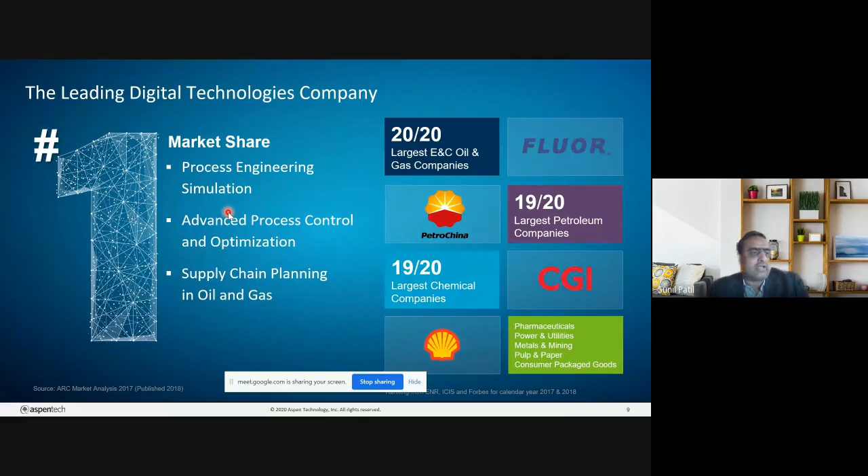What is unique to AspenTech? The key thing for AspenTech is basically deep domain expertise, because you will find many commercial simulators in the industry, but what's important is whether that simulation software has this domain expertise. What I really mean - if I have to design a heat exchanger, I can simply use Q equal to mCp delta T equal to UA delta T. These fundamentals won't change, but I'm really applying that - I'm accurately calculating U, I'm accurately calculating the area, I'm rightly sizing the exchanger, I'm rightly sizing the column.

It comes from the domain expertise, not from the software.

Software at the end of the day is code. One has to develop it and use algorithms to solve equations, but the important thing is domain expertise. We solve complex optimization problems, and AspenTech loves to solve complex problems. We have a track record of innovation, breadth and depth of mission-critical solutions, and we are hardware and platform agnostic. We don't care what platform or hardware the customer uses, whether it's a Dell server, Windows, or Linux. We support all software and hardware.

Most importantly, the last bullet point is ROI, return on investment. We measure on value. When we provide software to customers, the first and most important thing we measure is the value customers are getting out of it. That's how we measure success. It's not about how many licenses they have, but the value they are getting today. These are some of the uniqueness of AspenTech, and because of this, it's number one today and will remain number one. You'll hear from me about a lot of innovation, R&D, and new developments we're doing here.

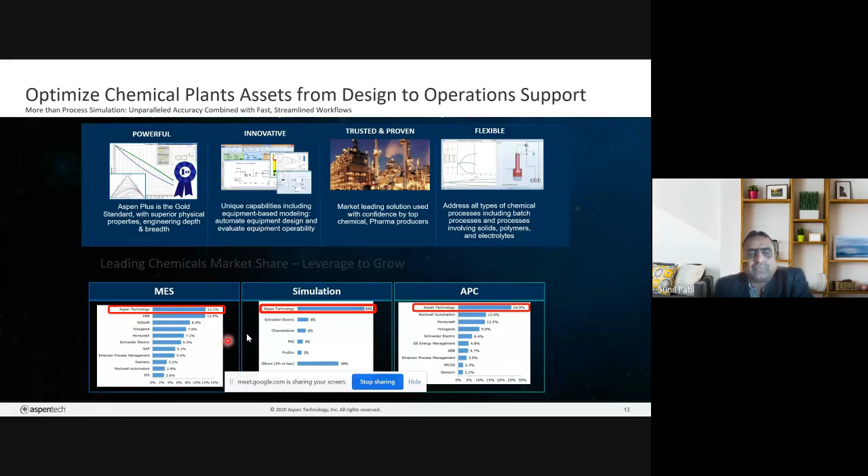We believe that optimizing asset performance in complex industrial environments makes the best companies even better. Meaning, we don't just solve one problem in the industry. Suppose there is a pump issue, or a column flooding issue - we don't solve just that one problem, we don't just fix one issue, we don't fix one equipment. We look at the entire asset, the entire plant, at a time. If the problem occurs at one place, we will make sure we address all the other problems in the plant. That's what we mean by asset performance. Asset meaning a plant - we are not talking about equipment or a process unit.

We are talking about assets, and this is the key word, as you will hear later today. Asset meaning the entire plant - software and insight that run the asset faster, safer, longer, and greener.

These are the keywords. So why are these softwares meant for? It is to ensure assets are faster - time to market is quick - safer, since safety is of prime importance for us, and longer, because the life of the plant is important. Historically people used to run a plant 15-20 years and then a revamp was required with a lot of technology changes. Now people are looking at 50, 60 years. And most importantly, greener - low emission, no pollution.

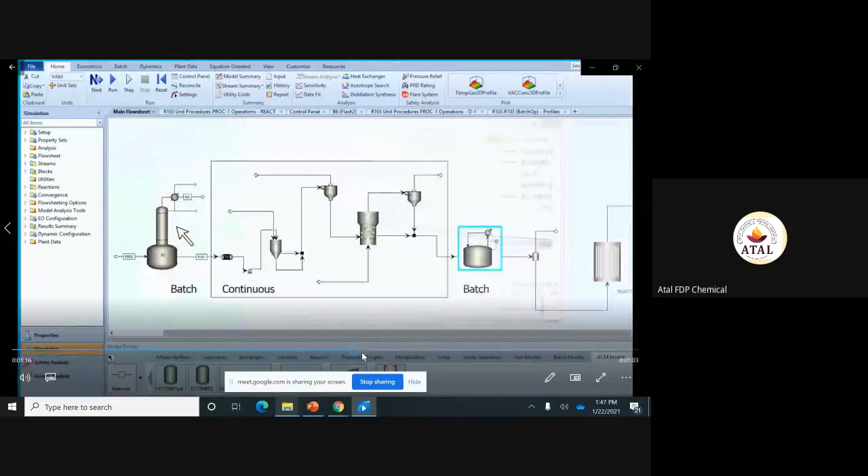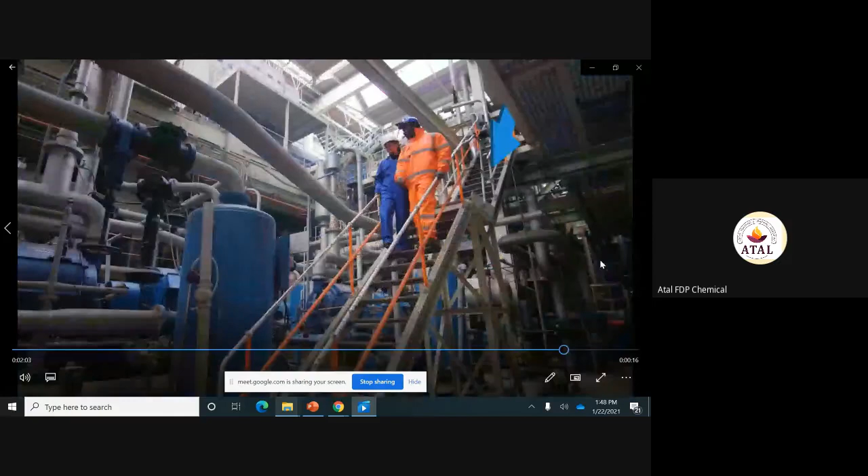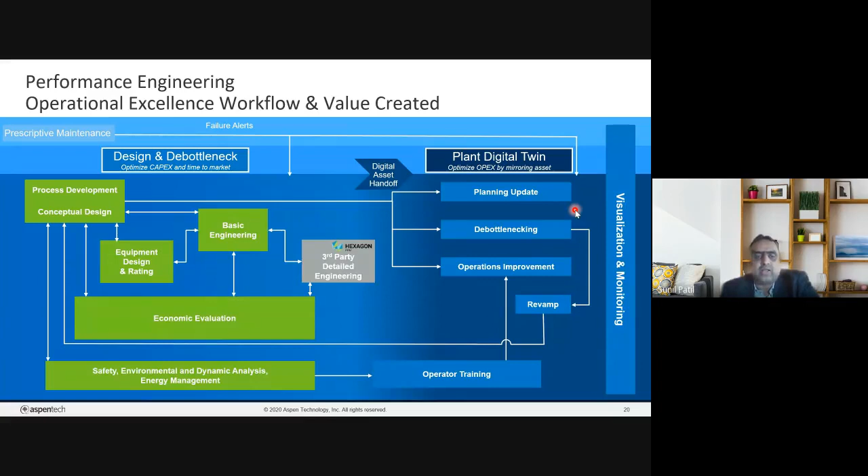And while doing that, most important is it's digitally transformed technologies and models. And you see some of the benefits here, ranging from certain percentage of reduction in capital and energy. For example, at a concept level, if you use the technologies, the savings in capital and energy from 5 to 20% is significant. Similarly, reduction in engineering design efforts, 30%, significant.

Reduce the flare loading, which actually reduces your emission. Reduce the emission, then revamp, reduce the capital, reduce the energy. Increase the capacity in debottlenecking, save certain cents per barrel. So these are the benefits.

As a consultant and engineer, when you talk to the industries, if you just talk about the solutions, no one will accept that. What people want is to see the number.

I just had a meeting with one of the Reliance board members last week, and I was a presenter, and of course we knew what they expect being Reliance. They have a very commercial mindset. My presentation started with a headline saving of X amount of dollar savings per barrel, and that's how the discussion started. Otherwise they would not have even given us the meeting to present.

So what's important to industry is the benefit, savings, value, not the technology and not the platform. But if the technology translates into value, improves the workflow, improves the digitization, people will welcome that. So whether it's in design stage, optimization, or plant operations, whatever stage you are in the industry, what matters is how the technology gives return on investment.

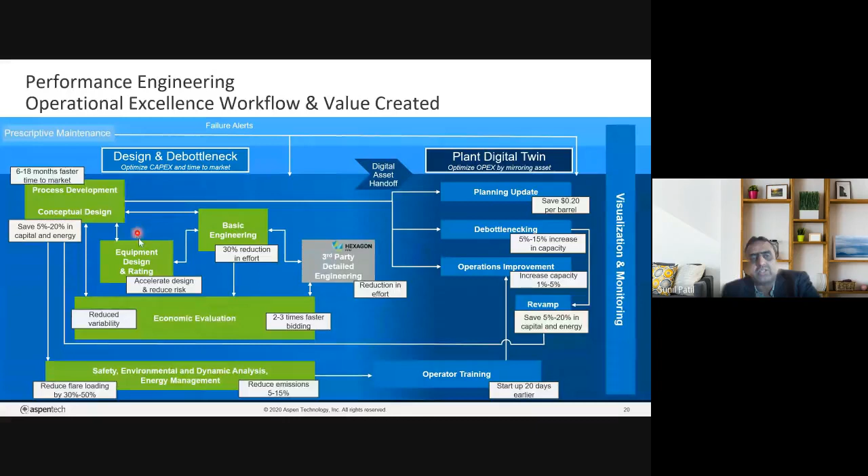Just to give a more specific example, I'll come back to this slide. You see this another architecture. This is more about Aspen's point of view, right? What I showed earlier was more of an industry point of view. But from Aspen's point of view, when I'm doing process design and conceptual design, we have two process simulation platforms. One is called Aspen Plus and the second is called Aspen HYSYS.

So we have two industry-leading process simulation softwares. Since I'm on this point, you may ask what is the difference between Aspen Plus and HYSYS? Actually both are process industry simulation softwares, but Aspen Plus is more designed to simulate chemical processes, chemical, petrochemical, pharma, as well as specialty chemicals. And HYSYS is more for energy industries, which is refining, upstream, oil and gas, and so on.

Irrespective of whatever platform you use for simulation, once you do that, how am I going to do equipment design, safety analysis, economic analysis, develop data sheets, PFDs, P&IDs, right? Because just simulation would give you equipment sizing and heat and mass balance, but that's not enough.

So from there, one can transfer the data into exchanger design and rating, where you can do heat exchanger sizing, shell and tube heat exchanger design, air-cooled heat exchanger design, TEMA design. You can also do plate fin exchanger design, size it, and check back into simulation whether those are feasible or not.

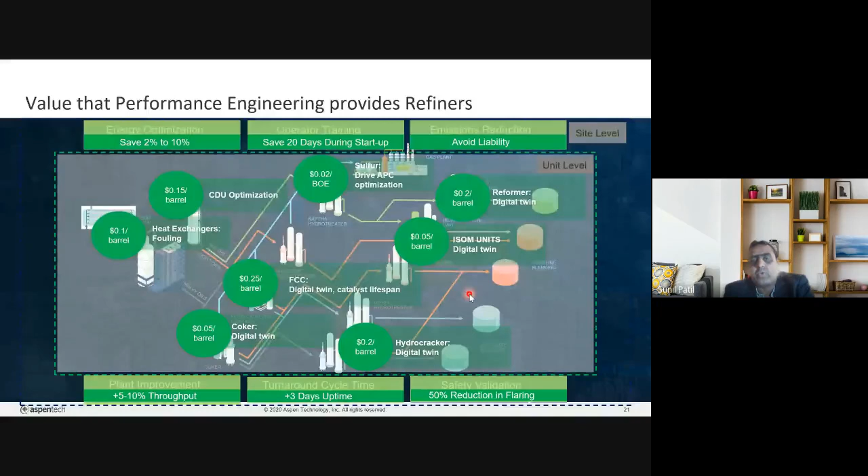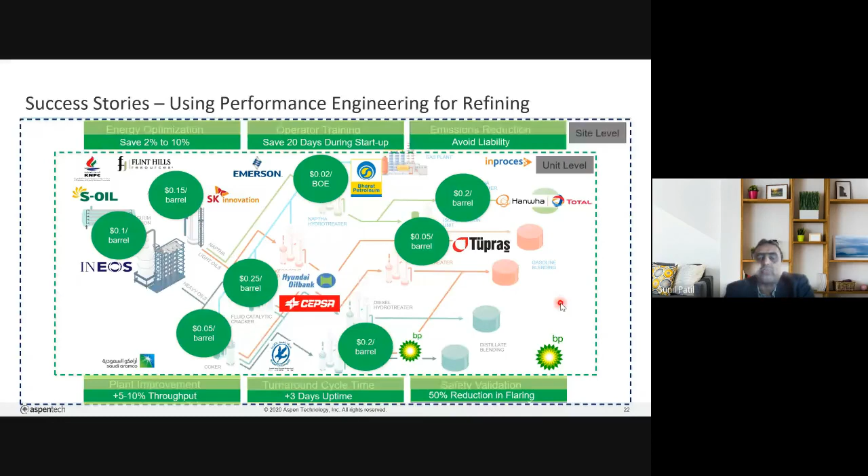Now, why can we confidently share these company names? Because these companies have actually published papers. We call them success stories, and we are allowed to use those papers to publicly talk about that, because people learn from peers. For example, BPCL can learn what Tupras is doing. Cepsa can learn what Ineos is doing, and they share with each other the best practices and try to adopt the technologies. Okay, so that's the performance engineering workflow which I talked about.

Okay, now moving forward, let's come back specific to some industries. I will take an example here for petrochemical, chemical, spec chem industry, which includes pharma as well. And our gold standard software for pharma is Aspen Plus.

So what is this about Aspen Plus? It is not just a steady state simulator. As I said earlier, this software is about the properties, and we have about almost 24,000 pure component data bank in our software data bank, which is very important to have. So when I say 24,000 pure components, meaning you'll find 24,000 components in the data bank with its properties.

And we do have NIST and DIPPR data banks available in the library. NIST stands for National Institute of Standards and Technology. If you go to their website, put any component name, let's say isopropyl alcohol, and try to download properties, it will ask you to pay money for that. So that huge data bank is available here.

Secondly, suppose there's a new component, a new molecule, developed by yourself, by your own innovation, by your own R&D, which obviously may not be available in the library of Aspen Plus. In that case, you can use ChemDraw to develop a structure for that component, or you may have some basic properties like molecular weight, boiling point, or vapor pressure. And with those minimum properties, Aspen Plus software could be able to predict the rest of the properties like density, viscosity, and so on.

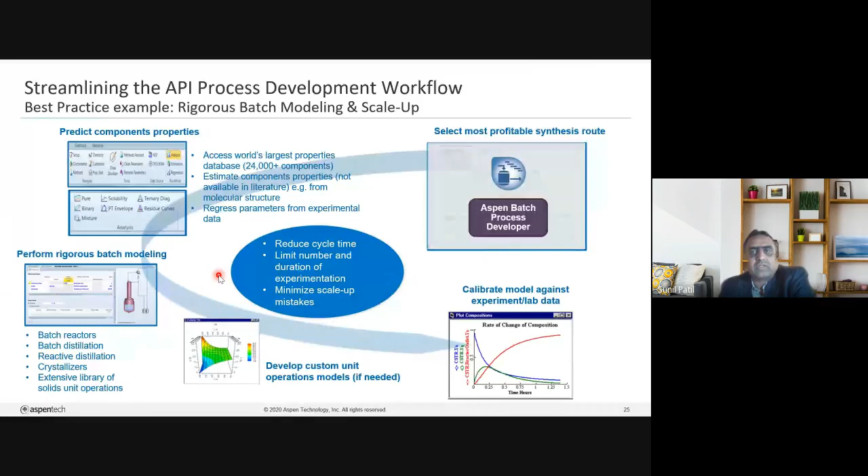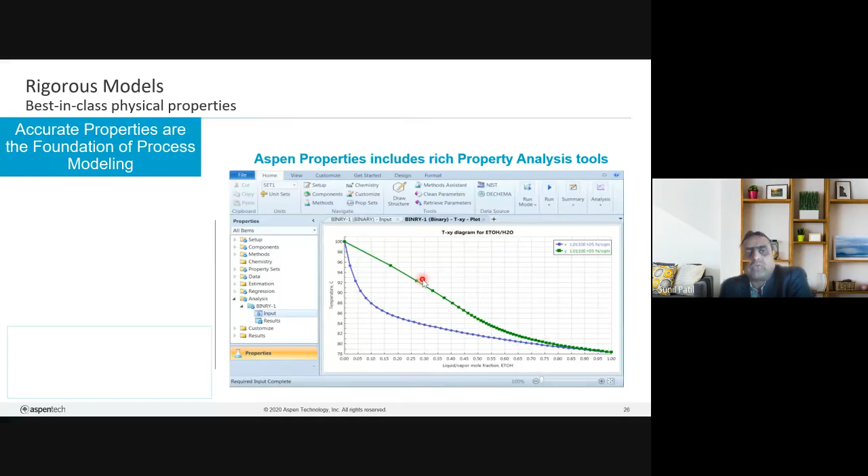So these are some software names. I mentioned about the properties—you see the property curve available. This is a TXY diagram, ethanol water system, a very common component. So one can very quickly get that TXY diagram. You define the pressure, give the range of vapor liquid equilibrium, and one should be able to get these curves very quickly. This is best in class property data bank, and Aspen has been awarded many R&D patents and R&D awards for the property data bank.

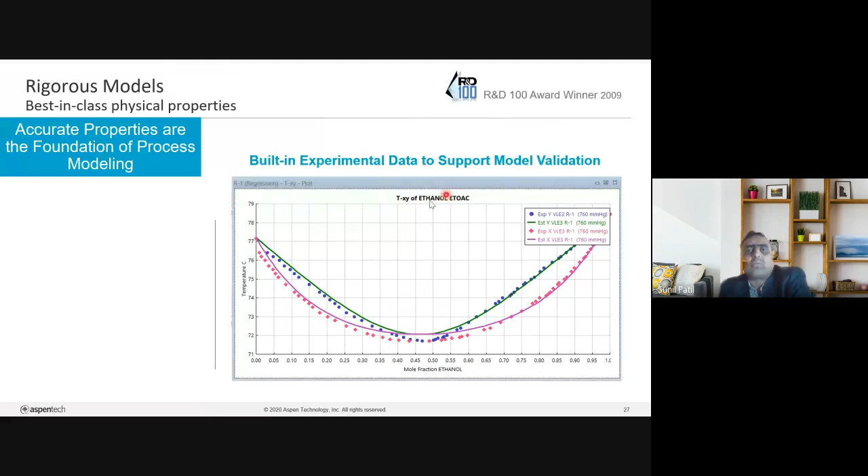Similarly, multi-purpose model. When I say multi-purpose, any process, typically in specialty chem or pharma, may have a combination of batch as well as continuous, or it may be just continuous or just batch. But at the same time, it will have solid unit operations like drying, crystallization, filtration, extraction, bleaching, and so many things. So how can I simulate everything in one environment?

Because continuous processes are typically steady state, which generally doesn't change with respect to time, whereas batch processes are dynamic. So the output in batch distillation, the purity of the fractionates, keeps changing with respect to time. It's hard to balance between steady state and dynamic because those are completely different unit operations. So these technologies help you do simultaneous batch as well as continuous process simulation in one platform, meaning it can run both steady state and dynamic together.

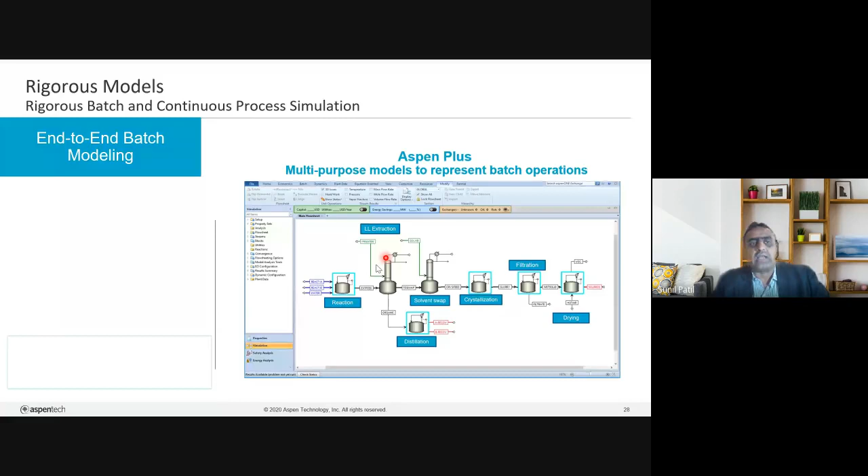So this is an example. As you see, this is a batch process—it changes with respect to time. This is a batch column. And there's a continuous example, or semi-batch as well. Sometimes it could be semi-batch, or sometimes a continuous process where the feedstock keeps changing, or catalyst rate may keep changing.

In that case, how do you look at the profile? If my feedstock changes, how is my product quality changing? How is my temperature profile in the reactor changing? Or if I'm doing a solubility analysis and I keep changing the solvent percentage, how is my solubility profile changing? I should be able to get it very quickly using the simulation platforms.

Now this is an example—you see batch and continuous process. And if you see the 3D graph here, it shows the profile of the reactors. So you can decide what parameters you want to track, whether it's temperature, pressure, flow, whatever you want to track.

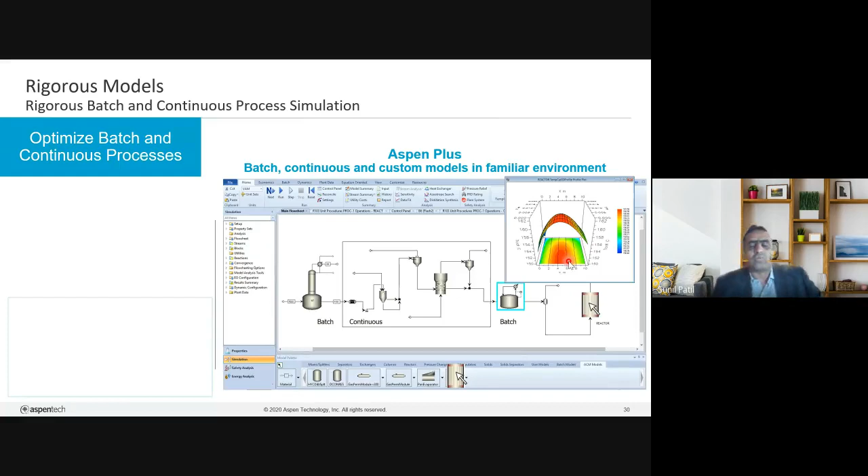Another important thing is the solid unit operations. In chemical engineering, we have MO—mechanical operations. I still remember we used to study the grinders, the mixers, sieve trays, and so many things—conveyors, crystallizers, granulators, scrubbers. This is very important because these are also very important unit operations. Aspen is the only software where you will find all these unit operations inside the platform.

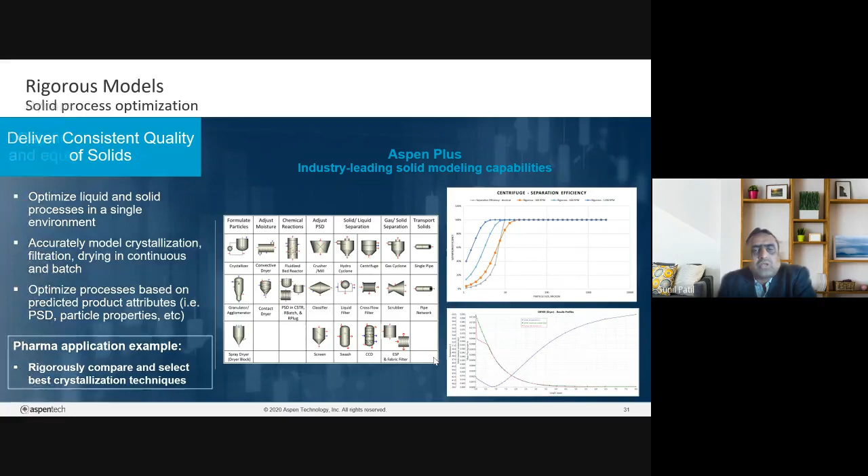I think some of you are still teaching this mechanical operation—particle size distribution, crystallization profile, drying profile, solubility profile, sieve profile. You can very quickly get this—you see this is a centrifuge separation efficiency. This is very important to simulate in solids. So these are some examples of how these are rigorously simulated into the simulation platform of Aspen Plus.

This is Aspen Custom Modeler. If you have any proprietary equipment, you can actually develop the equipment using your own equations, and you can create your own symbol and put it into the library. So that becomes your proprietary unit operation. No more do you have to use MATLAB or Fortran to code your own unit operation or simulate - this is available even out of box inside the program.

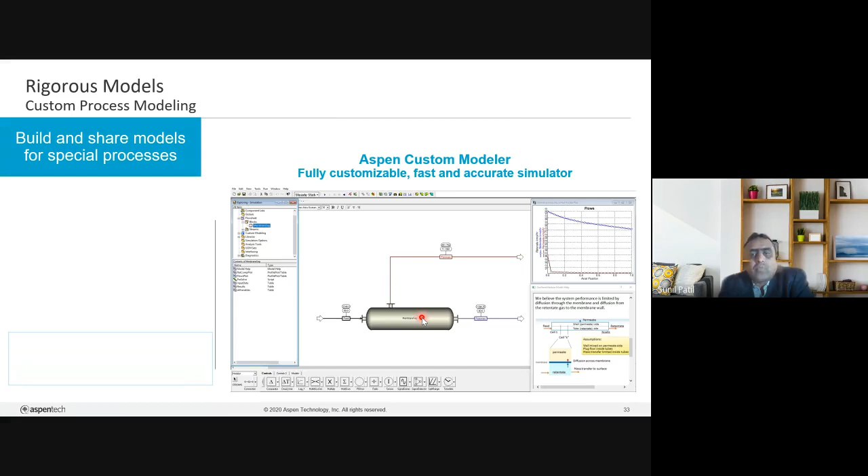Once lab scale is done, then that is done at a pilot scale. For example, 100 ml to like 5 liter to 10 liter to maximum 100 liter, and from there to 1 kL to 5 kL or 20 kL at full scale. So while doing this scale up, what is important is not just to change the capacity of the equipment, but to look at the kinetics, the reaction, the profile of the operation, then thermodynamics.

What it is called, from scaling up from lab to pilot to full, is recipe management. So typically we develop a recipe - like in lab, we have a recipe: add 5 ml of this, 10 ml of this, stir it for 10 minutes, heat it up to 80 degrees Celsius and things like that. And then you separate it, filter it and crystallize it. So this is a typical recipe in chemical engineering.

That is exactly what you do in batch process development - from when you develop a molecule, the software automatically does it for you. You define component A, B, C, reaction kinetics, all the properties are inbuilt, and then define the equipments. From there, click the batch process developer - it will develop the entire process flow diagram for you from lab to pilot, pilot to commercial, with the sizing of the equipment, batch cycle time, equipment capacities, agitator speed or whatnot, whatever is required, including energy requirement, capex requirement, opex requirement, and so on.

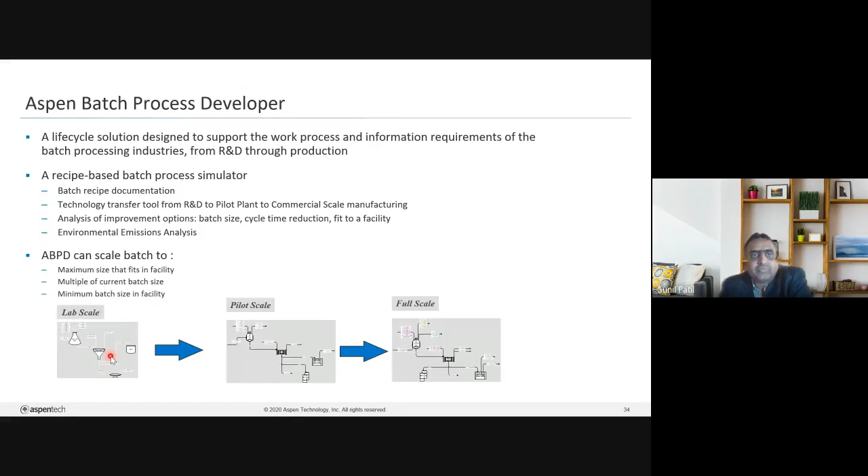Finally, I want to summarize my first section of the presentation - why Aspen Plus is preferred over other simulators. What are the key things, what is important? These are the key and unique things: it's about the properties, very important. I keep repeating that because it is very, very important in any process simulation. Unless you have accurate properties of any component, no matter how good you are at the calculations or how good you are at process flow sheeting...

Going back to a simple example: Q equals mCp delta T equals UA delta T. That Cp, an accurate value of Cp, is very important - that's why I think properties are important. And we have this deep and niche component data bank in the library, which is almost 33,000 components now. We have a unique thermodynamic engine which helps to actually develop the properties for unknown components.

Aspen Plus can solve any large and complex problem, not just an equipment - it could be as big as hundreds of columns and hundreds of pumps and heat exchangers or compressors, whatever unit operations you have, it can solve it.

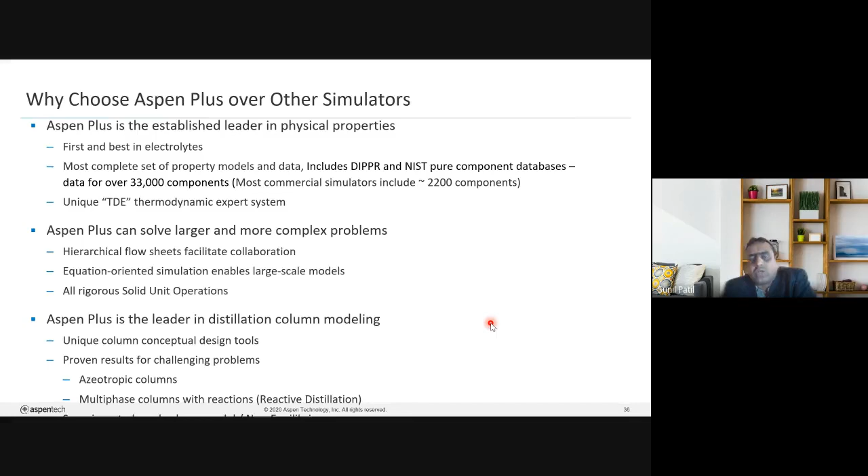I'll take a pause here before going into the case studies and real examples. I want to check if you have any questions from anyone. I'll go to the chat window to see if there are any questions, comments, or feedback. You can raise your hand or put it in the chat window. No? Okay, if not, then I'll continue.

Now, the second section is important. You'll find it more interesting. Is there any comment? Yeah, so there's one comment.

Does the software take care of time of the day? Yes, of course. The software takes care of time of the day, time of the batch cycle, time of the process. That's why it is very important to make sure the software can simulate both batch and continuous together. So time is important, and one key parameter or KPI of the batch software is to optimize the batch cycle time.

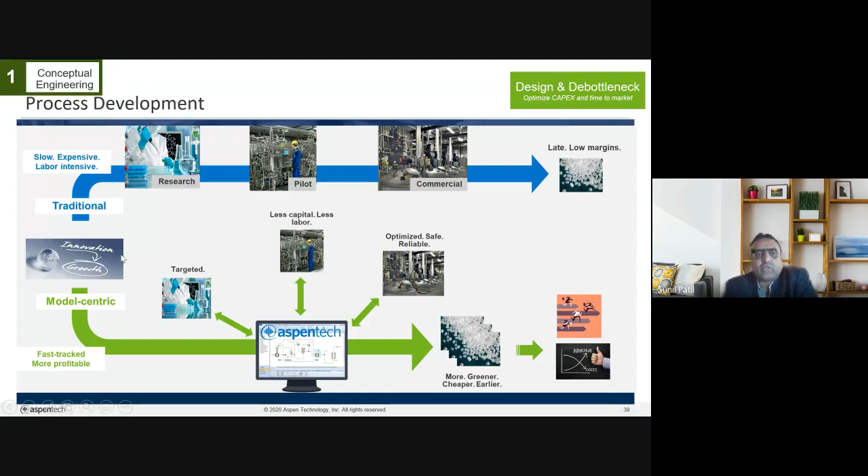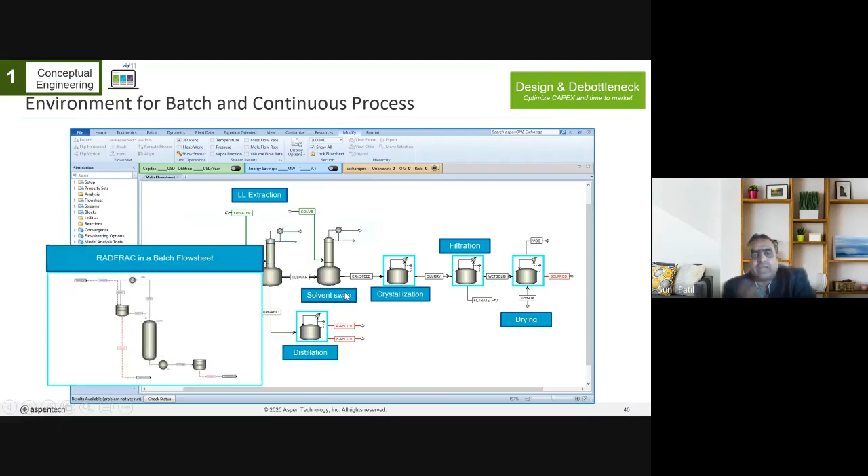Yeah, single environment for batch and continuous process. This is an actual real picture from one of the examples which I used. Be it a reaction, distillation, solvent extraction, crystallization, filtration, or drying, one can simulate everything in the same environment. So for batch distillation, you can see the various curves and graphs inside the simulator. The other example to look at is conceptual design.

When I put a flow sheet together with my heat exchanger columns and so on, once I do the sizing and get my heat and mass balance, what is important for me is the economics. How much is the capital cost? So one single click at the top ribbon button, you would get the cost of my process plant.

If you change the location to India, you will get the cost for India. If you choose Korea, you will get the cost for Korea. If you change the location to Singapore, you will get the cost of that process plant for Singapore, including utility cost.

Similarly, energy. Otherwise, you remember when we used to do a project, we used to actually calculate heat and mass balance for the entire project. Here, with one single click, it will give you how much is the energy consumption for my plant, and how much I can save.

Now, heat exchangers—every plant will have a number of heat exchangers. Are they operating in a safe zone? Is there any vibration issues? Is there any over design? Is there any mechanical risk inside the heat exchanger? Whether baffles are placed correctly, the software will automatically check it. Safety, reliability, PSV, blowdown, rupture disc sizing—everything it will look into.

Then if there are solid unit operations, that will be looked into as well—emissions, dynamic simulation, column operability issues, right? All is looked at in a holistic view in one environment while doing the simulation, be it starting from a new product, profitability, energy efficiency, safety, and so on.

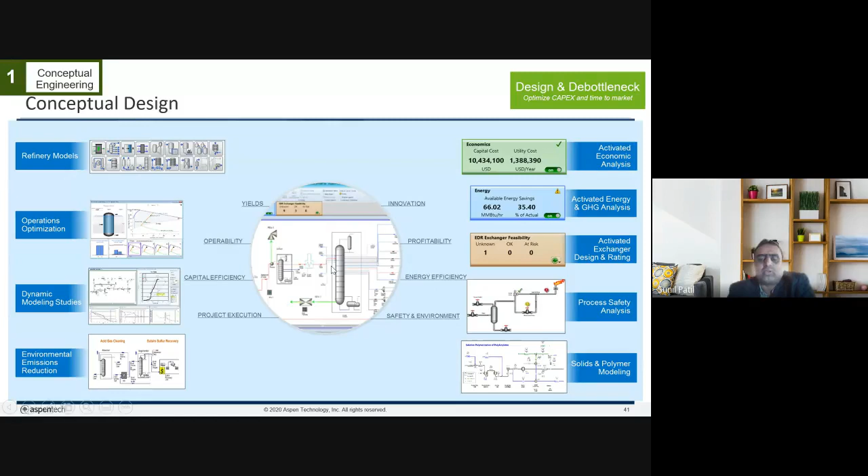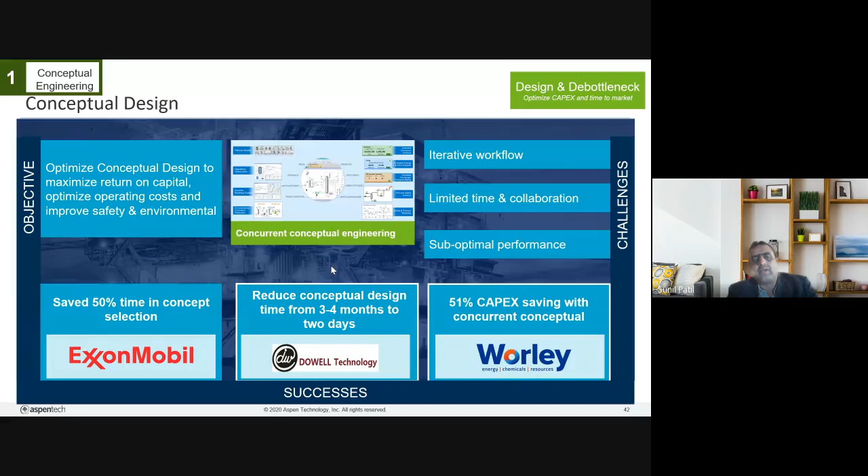Okay, so that's about concurrent engineering. And these are examples—companies like ExxonMobil, Dowell Technology, Worley Parsons, and so on have been using this software for a number of years for optimizing the conceptual design.

But just to elaborate a little more, these are some innovative things, and that's what I thought is very close to chemical engineering, and you would love it. Now, what we have inside the distillation column is the real geometries, real trays. So typically, distillation columns are designed using the equilibrium approach, meaning we make a lot of assumptions. For example, we assume that the trays are at equilibrium, the vapor leaving and liquid leaving are at equilibrium, and that's what we play with using the term called efficiency.

Murphree tray efficiency, column efficiency, packing efficiency, HETP—we use those to factor in those unknown things, because we assume equilibrium. But in reality, the columns are not in equilibrium. That is why Aspen software actually does the simulation using the non-equilibrium approach, meaning we don't have to define the efficiency, we have to define the actual geometries and flow profiles of the vapor and liquid inside the column. And that's what you see—you'll actually see inside the column what is happening, whether it's flooding or weeping. You don't see the number, but you actually visually see what is happening inside the column.

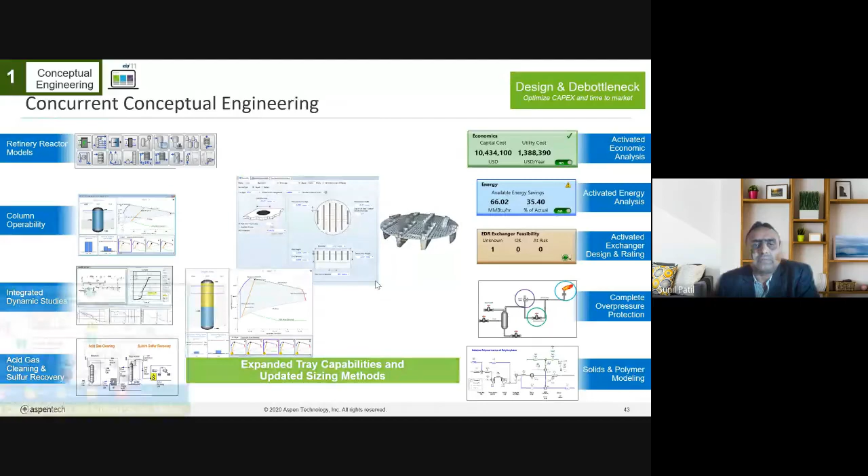It's like you actually open a real distillation column and you are seeing it in a plant. So virtually you are seeing it in the simulation environment. That's what this is—the tray capabilities are available inside the simulation environment. Okay, this is a very unique thing.

Let's move from conceptual engineering to FEED. FEED stands for front-end engineering design. Typically in the process industry, companies develop the FEED package, which includes the design data sheet, PFDs, line list, instrument, and P&IDs, because that's also an important aspect.

Within the simulation, with one single click, you can develop the PFD, heat and mass balance, data sheet, equipment list, everything automatically. Otherwise, imagine how many draftsmen would be required to develop that.

It's not typically a chemical engineering job to develop a drawing and punch in the data. Typically in the industry, draftsmen do that. But when draftsmen do this job, it's more of a data-filling job, because they don't know what value it is or how it's calculated. Chemical engineers know it better.

So this is automatically developed from simulation. You see the PFD, heat and mass balance, data sheet, and so on. And this is called a FEED package.

Further, if you have to convert that from basic to detail engineering, those are non-AspenTech softwares like Hexagon, Aveva, and so on. But our softwares do integrate with the detail engineering softwares. Detail engineering softwares are typically for 3D or detail piping layout, piping engineering, stress analysis - those things come into detail engineering. So we are not into detail engineering.

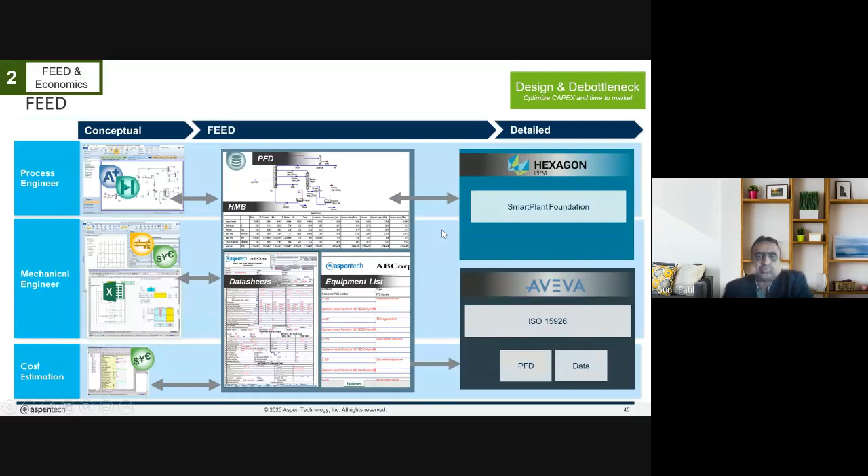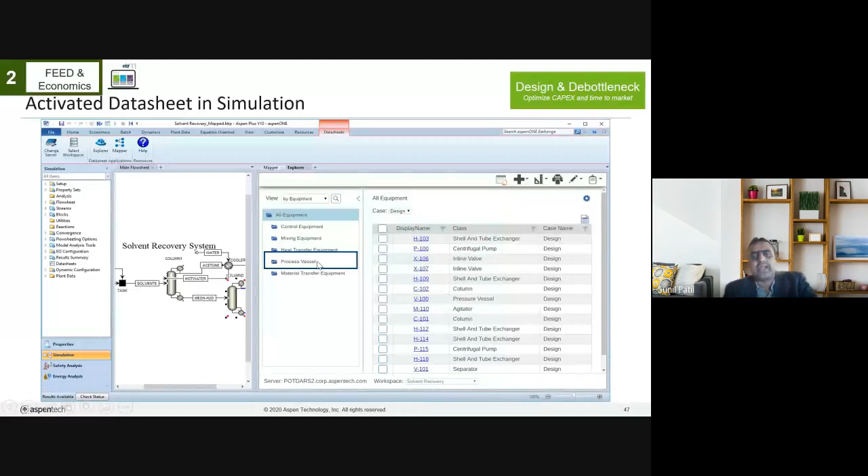These are some success stories. So this is an example: when I'm into simulation, I can choose the equipment and just right click, select the type of equipment, and you will get a data sheet within the simulation environment. Then one can save it, print it, or PDF it, whatever way you want.

Next, economic evaluation. Once I develop the process flow sheet, I can quickly do the economic evaluation of my plant, meaning I can get the capex and opex, which is capital cost and operating cost.

Using the simulation and the data bank, the software will be able to do the mechanical sizing. Remember, process simulation softwares are always for process design - they are not mechanical sizing softwares. To get mechanical sizing, as we learned in equipment design, you need to calculate thickness, weight, baffle type, sizing - all that is mechanical.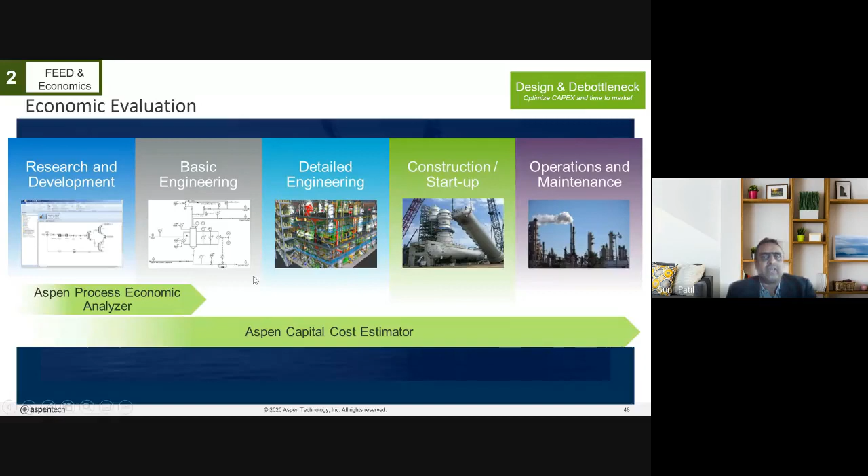In order to get the costing, we need mechanical information. So are we dependent on mechanical engineering? No. Based on the process design, before it goes into capital cost, the software does the mechanical sizing and gives you the capital cost of the entire process unit. So this is the one single model which gives the costing as well.

Now you may ask, does the software have a cost database? The answer is yes - it has a cost database for 89 countries in the world, and for India we provide cost database for Mumbai and Delhi. Twice a year we update that database into the software. That's what the software also does - the economic analysis. You remember the PEPE subject, right? At least I remember it from my final year. So this is all about economic evaluation.

And the integrated risk management - this is important, and companies are very cautious about that. See, companies like Reliance, when I talk to their board of directors, the first thing they ask me about is risk. If I'm going to put my money into this plant, like the $20 billion J3 Jamnagar project, what are the risks involved?

Risk could be political risk, environmental risk, market risk, or situations like COVID - these all become risk. And in that case, how is my project going to be impacted? That is called risk analysis, and risk analysis is done using Monte Carlo analysis. Our software also does Monte Carlo analysis, which takes care of all these aspects of risk.

For example, the Ratnagiri refinery project - it is on hold now just because of a political issue, there is no land available. Government has the money, funded or shared by Saudi Aramco, since it's a joint venture with Saudi Aramco, Indian Oil, and other public sector companies. So money is not a concern, but there is a political risk. And because of just that political risk, it has been on hold for the last two years.

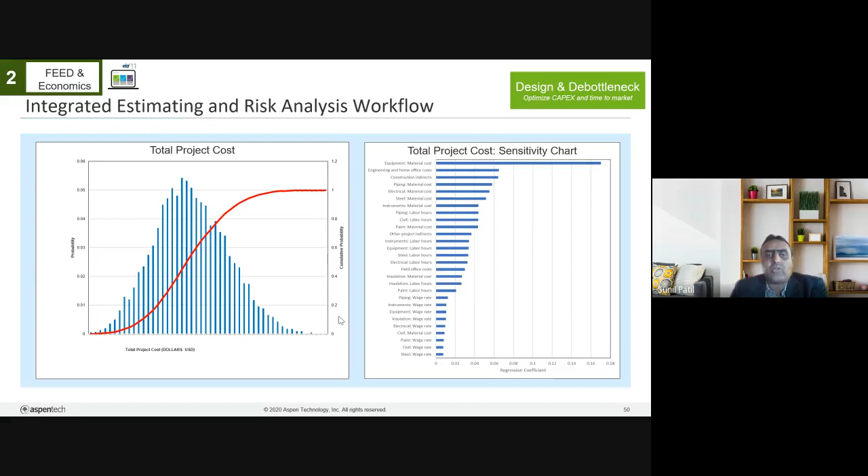So it's also very important to look at market risk as well. That includes oil price fluctuations, situations like COVID, right? No one knew COVID was going to come, and it completely changed and impacted the market. That is called risk analysis. In the interest of time I won't go into details, but you can search Google for what Monte Carlo analysis is. This is another aspect of process optimization.

And finally, safety and sustainability. It's very important, right? The plant design might be good, operations might be best optimized, but if safety is not there, no one is going to approve the plant. Safety is the prime most important thing in any process industry. Unless safety is there, it doesn't matter what you produce or how good the quality is. Safety is important, so fire safety, emissions, all these are very important.

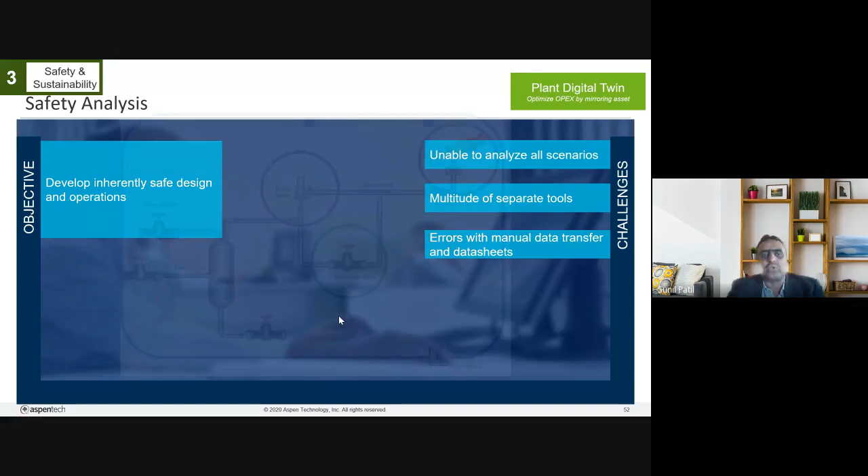The most important thing in industry is to design the PSV, pressure relief valve, rupture disc, blowdown valves, because in emergency situations, how am I going to vent it? That's why you see flares always burning in the industry. We see a lot more in India, but I've visited many refineries in the world, in Australia, Korea, and Japan. I still cannot believe those are called refineries - very close to zero emissions, zero flare. That is what the Indian government is putting pressure on, the sustainability of Indian refining companies.

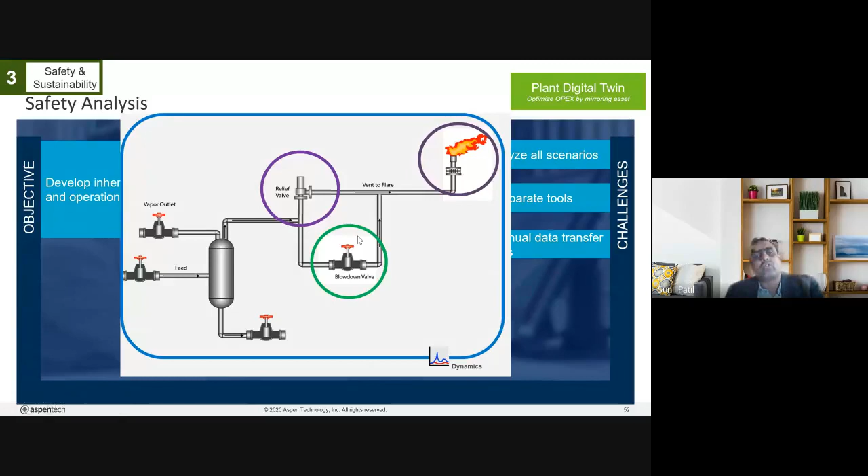And that's where these softwares play an important role. If there is no flare, or an X percentage energy saving, these companies are given a lot of concessions, funds, and benefits from the government. They actually put in money if companies save emissions and energy and so on. So safety is a very important aspect. For PSV sizing, rupture disc design, there are a lot of PSV codes - API, TEMA, and all those codes are required, and they're used in the safety analysis.

Safety is an important aspect as well. Finally, there's the safety documentation, like PSV valves, design capacities, and operation capacities. There's typically always a margin between design and operation, and that's an important aspect as well.

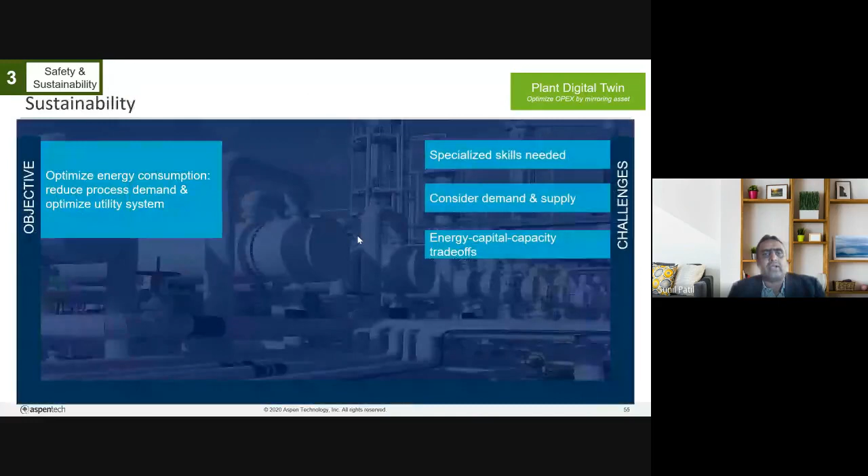Another important aspect is sustainability. What is sustainability? It's about emissions, energy, carbon capture, CO2 - it's all about the green process industry. Now, when we talk about sustainability, there are two things: energy required in a process, called demand, and energy supplied, which is your utilities.

For example, in any process industry you'll have boilers, HRSGs, turbines, and waste heat recovery units - those are energy supply units. Who are the consumers? The process units. Every distillation column requires energy, every heated reactor needs energy - those are energy consumed. So one can optimize energy consumption at the demand side by optimizing the process.

But it's also very important to optimize the supply of energy. For example, a boiler can be operated on coal, oil, or a certain mix of different fuel types. So how do I optimize my supply? Because if I save money in supply, I also cannot compromise on demand. Let's say I need 20 tons of HP steam per hour - that's a constant demand, and one has to maintain it continuously. But while maintaining that demand, how can I optimize my steam production, and optimize my flare from the boiler units? This is the balance between supply and demand.

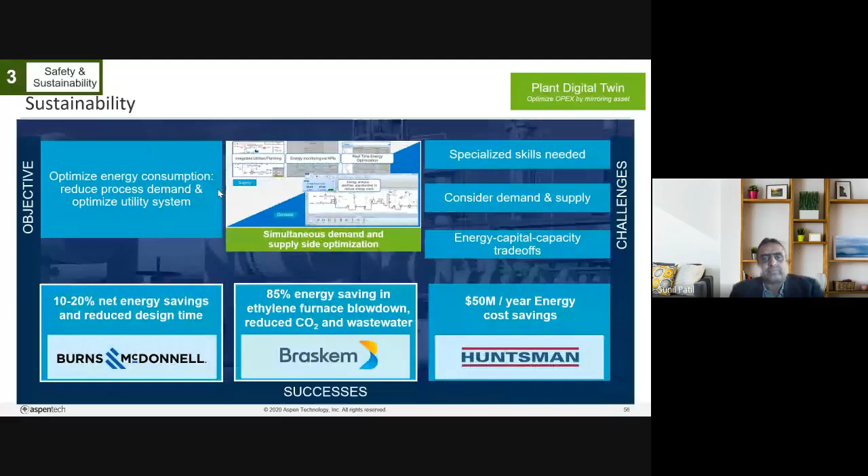Okay, so those are a few examples I talked about, right?

Now, very briefly, when we do planning in the refinery, how much production planning for gasoline, kero, aviation fuel, all depends on the demand from the market. That demand is my plan, so I'll produce these products for the next month, running my refinery with Arab Light crude, Bombay High crude, and various crudes from various locations. So how is crude selection done in the refining industry? It depends on market demand, crude availability, and crude price.

But typically, what often happens in the plant is that I do the plan, but the actual goes in a different way. My actual production should go parallel with my plan, but it never happens because of a lot of uncertainties, abnormality in the plant, the process not going as planned, or unplanned events happening. So this is called the lost opportunity—we are losing that much money.

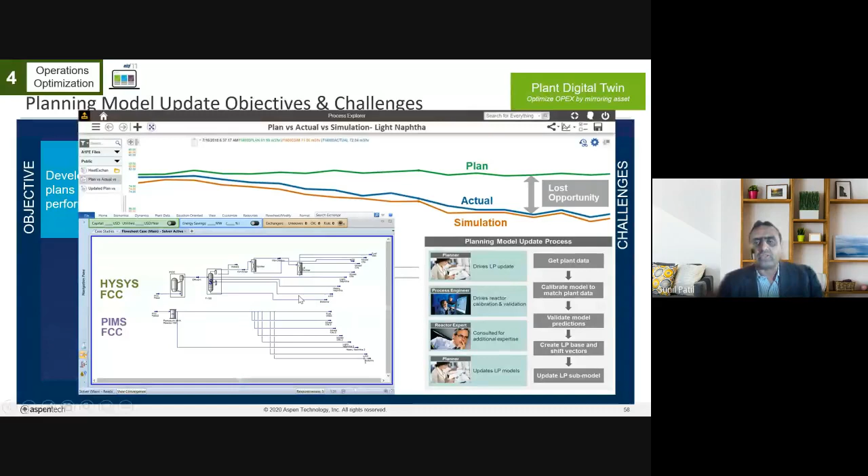In order to bridge that gap, what really helps is simulation. Simulation helps bridge this gap and navigates you to come closer to the plan always. This is a real example, but it takes time to explain—if anyone is interested I can do that, because I myself have worked on and done a lot of consulting on this planning model update using simulation in the refining industry. It plays an important role.

Finally, this is again a very innovative thing we call smart refinery. Refinery is not just about distillation or the cracker—it's about cracking the crude into the molecule level. This is a new trend coming up, meaning getting the properties of every component at a molecule level. This is chemistry—we bring the crude, crack it or separate it in a column, and then crack it at various crackers to get different components. You see LPG, motor gasoline, aviation fuel, diesel, and so on.

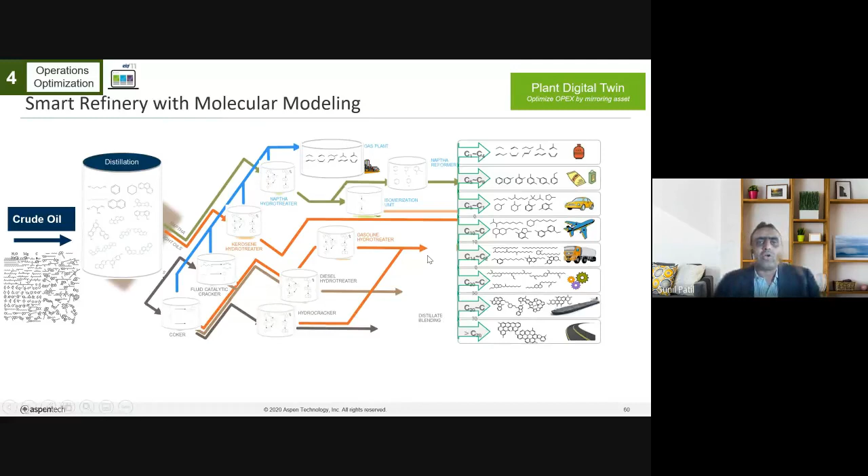But whether I'm getting all the required properties here, whether I'm complying with Euro 6 or Bharat 6 or Bharat 7, whatever comes up next—what is my sulfur content? Sulfur is key in my properties. More the sulfur, cheaper the crude; higher the sulfur, cheaper the crude. Lower the sulfur, crude price goes up naturally. So all these factors are important, and that's why molecular modeling is another new concept important in the industry.

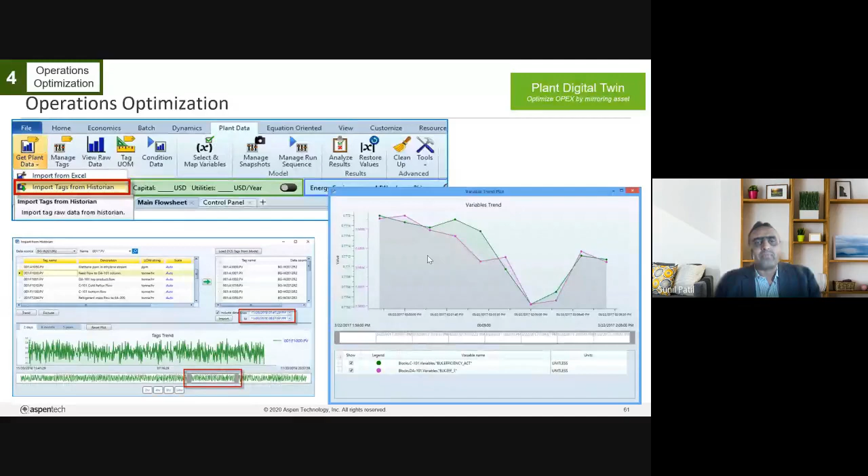Finally, operation optimization. Operation optimization is about plant optimization. Once the plant is designed and up and running, the most important thing is how I optimize my plant with my current conditions.

The other thing I talked about is the training simulator, called OTS—it's also very important. How do I train my operators? When process engineers join the industry, they cannot go straight to the control room and operate the plant—they need experience. Although they are chemical engineers, they need experience for plant operations. So OTS is nothing but a virtual plant. It creates a virtual plant on a computer platform using software like HYSYS, which is used to teach and train operators and process engineers.

They run it, create various scenarios, trip the plant, trip the power, see the impact, and then take various actions—that's how they learn. This is another aspect of process simulation in the industry, so training is very important, using the simulator. It's similar in other industries, like pilots being trained in flight simulators—process engineers are similarly trained using the process simulator. This is what we call OTS.

Okay, now I'm moving to another topic. I covered the simulation basics and where Aspen stands in that, then industry use cases for conceptual design, operations, OTS, feed, economics, and everything. Now I'll touch upon a new topic—I won't go into details in the interest of time, but this is very important: where is the industry looking now? This is about sustainability. Sustainability is the key word in the industry, right?

Let's look at some of the technology use cases. I already talked about energy, so I'll skip it for a minute. This is about the energy consumption, right? So this is a typical column again. How do I look at my column sustainability in terms of energy consumption, in terms of reducing emission, in terms of improving the margins, and visualizing inside the column what's happening - flooding, weeping, or any other operational constraints and so on.

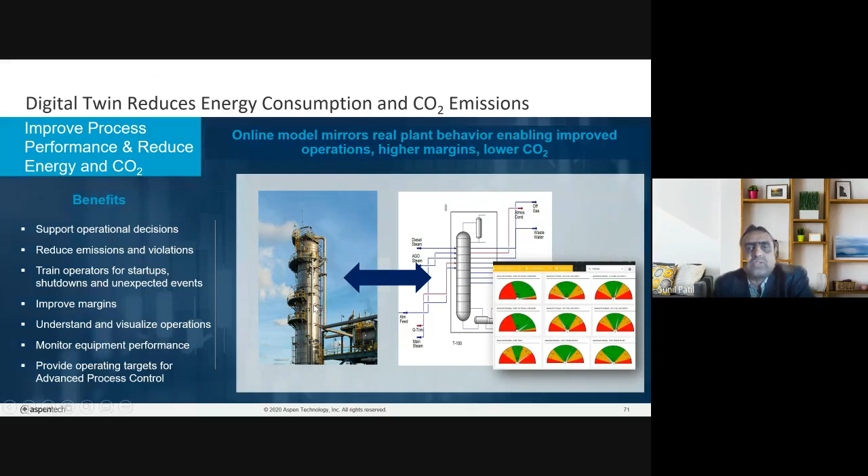I want to give this BPCL example, Bharat Petroleum, where I myself personally engaged in this project, and we got an award from Government of India - ASSOCHAM India, last year. It's just a recent project, October, November we got it. It's the best innovation project awarded by ASSOCHAM, and of course there are a lot of other awards. But the reason I want to highlight this is because it is from government, and this award is actually given to AspenTech and BPCL. So we developed an emission model, what is called a digital twin, for emission tracking, reporting, and controlling the emission.

The HYSYS model was developed to actually track the emission by controlling the CO2, SOx, NOx emissions in the furnace, FCC furnace, as well as the rest of the process plant. This is for Kochi refinery, not for Mumbai. The first principle HYSYS model was used for that. So this is a very unique and classic case. This is a summary of that paper, but it has been presented in many international journals already. If you want, I can send a link or paper PDF copy. But this is a real case study where we have been awarded by government on this emission monitoring.

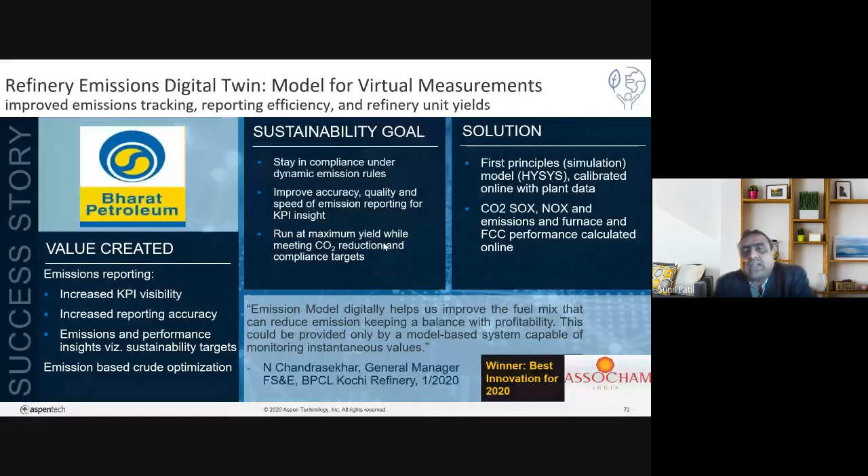So the reason I want to share this is because this is what industry is now looking into - not about optimizing the column, it's about how do I reduce the emission, how do I reduce the carbon footprint. Many companies, including Reliance - you know what is Reliance chairman's vision for Reliance? Not to put one more refinery or increase the crude capacity, but the vision is how Reliance can become, by 2030, net carbon zero. You see their reports - Reliance or companies like Reliance are targeting to become net carbon zero by 2030, meaning another 10 years. They want to absolutely make the carbon emissions zero. So that is really the focus in the industry now. That's about the BPCL example.

And lastly, about circular economy - it's very, very important. What is circular economy? It's about recycling plastic, using renewable feedstock and so on. You can imagine the PET bottles, the drinking water bottles which we use in day-to-day life. If we go to a restaurant, we simply buy the bottles now, right? We no longer drink normal water, even though it's safe to drink. So that has created significant plastic wastage. Almost $1.5 billion worth of PET wastage has been generated. So people used to dump it into the sea, or dump it in concrete blocks and things like that.

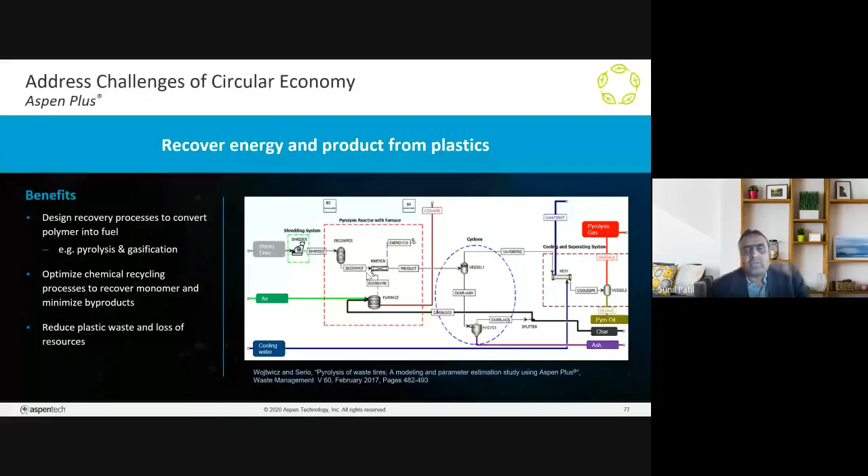The bottom line here is the importance of recycling, and this is the new term in the industry called circular economy. People talk a lot about circular economy, and the industry evolves around three things: resource efficiencies, energy transition, and decarbonization and circular economy. These will be the next key things in the process industry.

Investment is saturating, the plants are saturated. You can see not many new plants are coming up in India - there isn't much investment happening. In fact, there's a lot of mergers happening, plants are being shut down, people are not continuing to operate, because sustenance becomes more important than putting up a new plant now. So these are the key things here.

All right, so I will take a pause here before I move to my next slot. Any more questions from anyone, or any comment?

One comment I see here: catalyst effectiveness study - I will answer this, it's coming soon. Yes, catalyst effectiveness and catalyst deactivation is very well studied in both Aspen Plus and HYSYS, and we have a lot of examples, madam, where catalyst deactivation is studied. Also, we can do cost analysis - only thing is the catalyst cost is not available in our library. In our library, only equipment and material cost is available, but not the feedstock, component, or catalyst cost, because it's a huge market and a lot of components change a lot. So we don't have that - the user has to input it. But it's a good question. Yes, we do study catalyst effectiveness as well as catalyst deactivation profile, and of course cost analysis, provided you input the cost data.

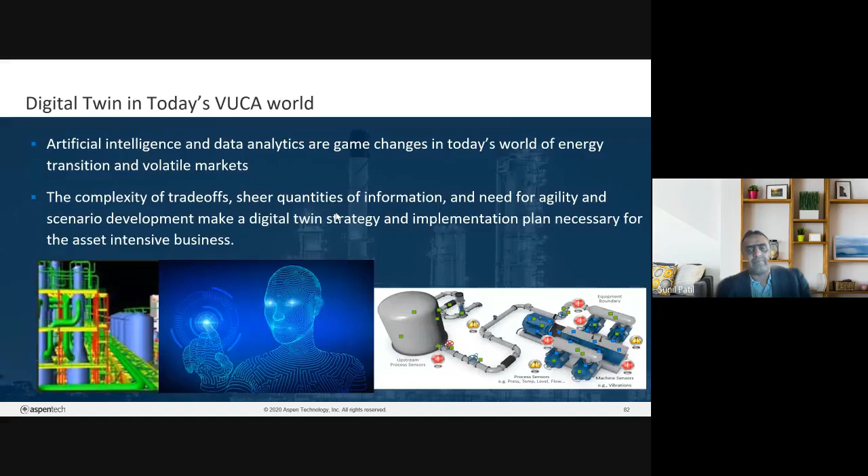So here are a few definitions - I purposefully put this to understand what digital twin means. This is a new word. Digital twin is nothing but - there are various definitions I captured from multiple sources, and Aspen defines it the same way - it is a virtual copy of the asset, process, business, meaning everything is on your desktop, at your home, on your machine, mobile device, tablet. Everything you're operating virtually. It provides a remote view of the asset.

What is happening in the plant, I can see here. It can predict future results - I can predict, okay, my feedstock has changed, what's going to happen in my plant, how it will change my throughput, how it will impact my properties - everything I predict sitting here, I don't have to physically go there. Then predict asset degradation - madam asked a question about catalyst degradation, catalyst deactivation, process failures, activities, and a lot of other things.

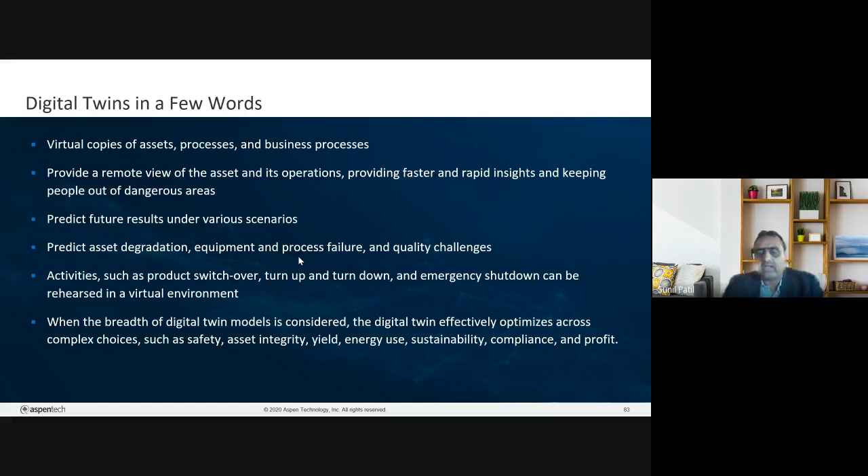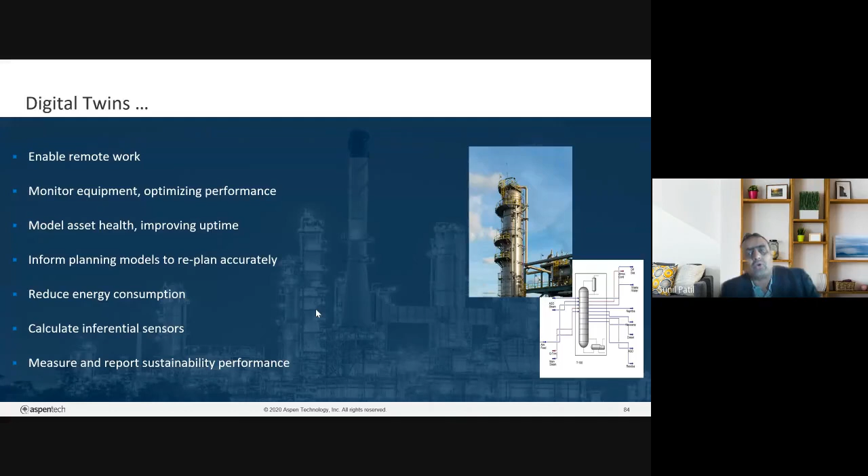So these are the definitions of digital twin, meaning creating a virtual asset on your machine, on your platform, and operating it remotely. In simple words, it enables remote work - monitor equipment remotely, check the health, and so on. Like a call center, like when I call a bank, and they give you information about the asset or the health of your account - is there any issue, any wrong transaction happened, you can solve it remotely. This is exactly what we are going to do in the process industry.

Okay, so just an example - you saw this diagram again. This is a virtual digital twin for a distillation column. So what I'm going to show you here are some examples.

So one may have a question, what's the role of process engineer? Of course, process engineers are still required. We are not eliminating any process engineer job here, but we are making it easier for a process engineer to do their job. Otherwise, how would this have happened in the real world? You have to go in the morning, first shift, then take the logs and see the values of what happened in the night shift. There is no proper data transfer, then you do manual calculation, and by the time you do that, you lost the opportunity.

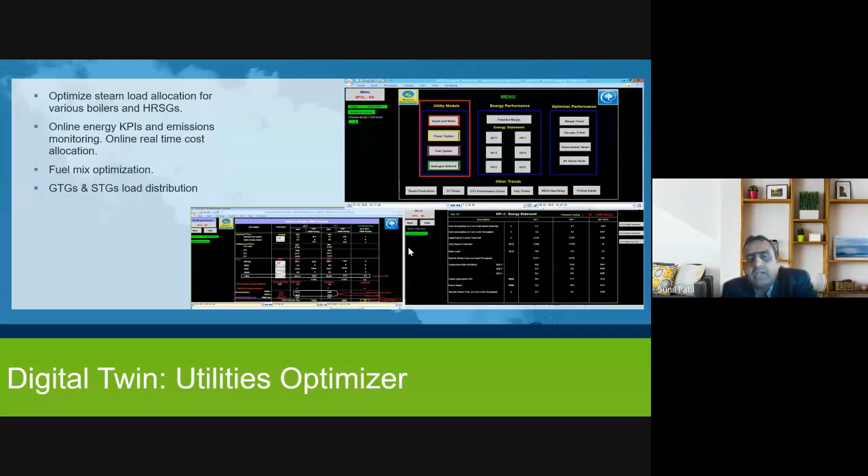And in this current environment, sometimes it is hard to go to the plant because of travel restrictions, COVID, and all that. So these are some graphics. This is a real example.

So the process engineer, process manager, operator will get an SMS, email immediately—something went wrong in the plant. It's not that they have to think and take corrective action themselves; the software will also suggest what action they should take. Immediately the alert goes out: this has gone off beyond the operating range, reduce this, change this.

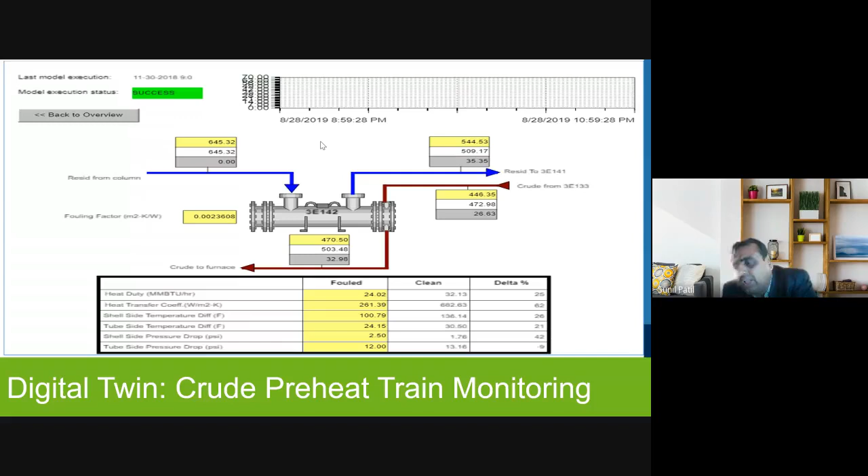There could be physical inspection required, so it sends the message to the plant person to check that. That is what is really called a digital twin. And I'm not talking about a dream—this is reality, it is already there. Even in India, it is in the BPCL Mumbai refinery.

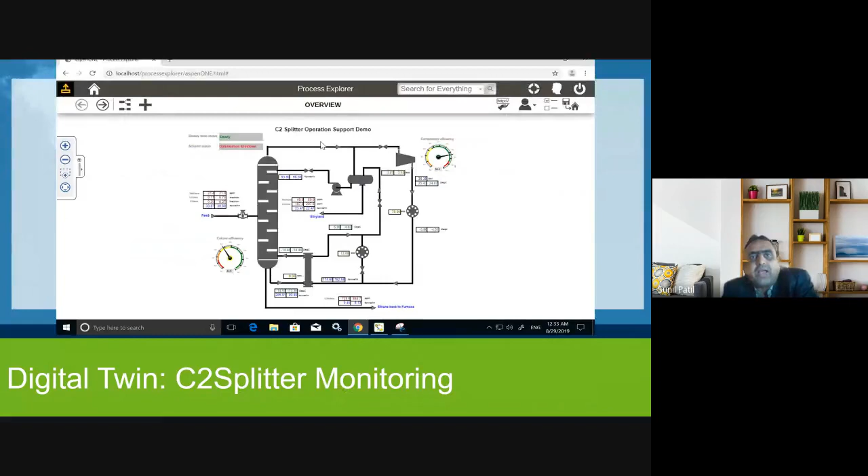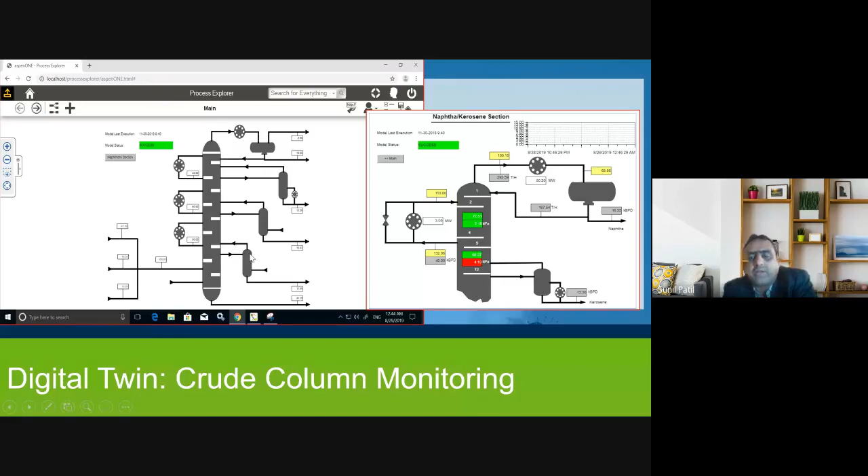So this is another example—this is a C2 splitter column. I just put some screen captures to give an idea of what I mean by digital twin. This is crude column monitoring. Crude column monitoring is not just a parameter, but you actually see—it's not with a CCTV camera that you're able to see, but because it's a virtual plant, it actually replicates the real scenario in the process simulator, showing what is happening in the plant. So that's about the process digital twin.

What about operational digital twin? Operational digital twin is about supply chain, about planning, about scheduling. Suppose my material is supposed to transfer from India to Europe or Europe to some other location, and if there is any disturbance, if there is an issue about delay in supply or some abnormal thing happens—how do I smoothen that? How do I reduce that supply time? How do I optimize the demand supply? So all that is done through the operational digital twin.

So that is what we call equipment failure, early event detection, what we call it. If you know, okay, I'm going to get a heart attack in the next 3 days, what am I going to do? Am I going to sit at home? No, I'm going to see my doctor, take the advice, and take corrective action immediately. But I can only do that when I know well in advance. If I don't, then it fails, right?

Same in the process industry. If I know well in advance my compressor is going to fail because of so many parameters, or because of my suction pressure, because of my bearing, then I'll fix that immediately. That is what we call bringing artificial intelligence and data into the simulation.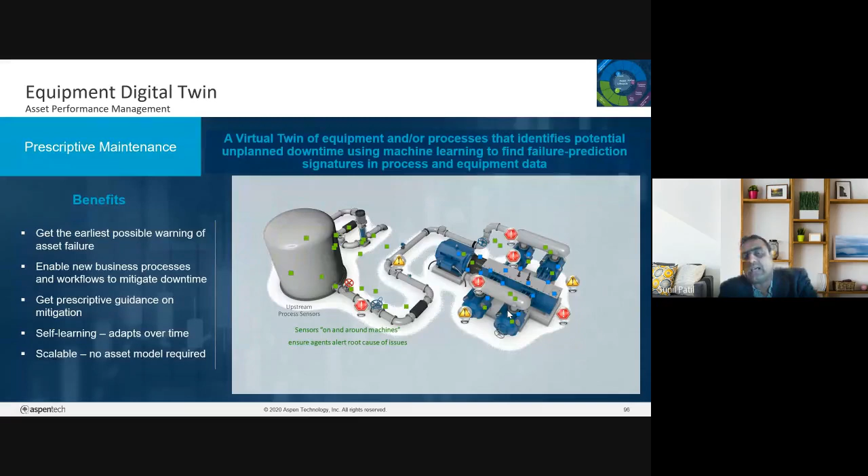Okay, let's move on a little bit. And I'm coming to probably my last part, which is I'll talk about industrial AI and the future, but I'll go there.

What's really coming into this is about the data, the devices, and what I mentioned as Industry 4.0 technology. Just having data is not enough. For example, I know my blood parameters, my sugar level, all my health conditions, but having that data, what am I going to do with it? I need a doctor, a consultant, to analyze that and prescribe the right solution. So just having data is not enough, you need AI, you need knowledge, you need a consultant to fix the problem.

So what Amazon does is it looks at your historical purchase pattern, and if there's a similar offer or discount available on something you want, it keeps reminding you, because just data is not enough. Amazon also knows what you're trying to buy. Similar here as well.

I'll skip this in the interest of time, this is all regarding Aspen. Now we call this term industrial AI, because AI is there in all industries, not just process industry. AI is already in telecom, in healthcare, in automobile, aviation, everywhere. But in process industry it is maybe new, though it's picked up in the last couple of years. That's what Aspen calls industrial AI.

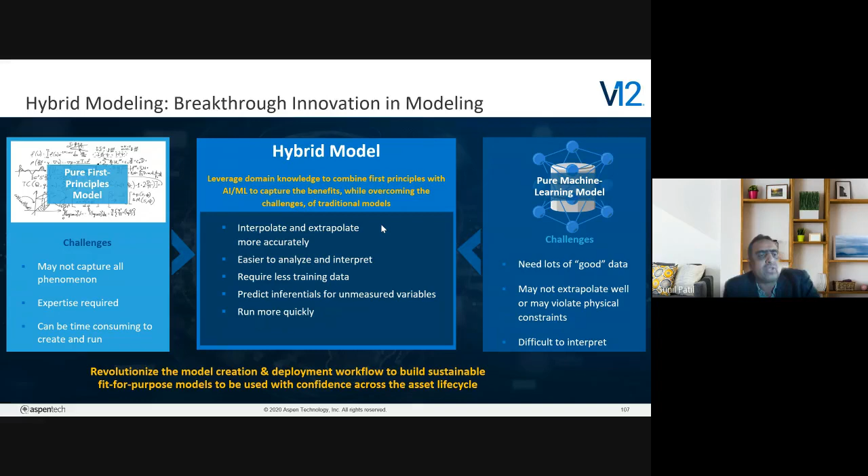I can analyze my process very easily, run the model faster, and so on. This is a big breakthrough innovation we've already launched in version V12. You may have a question: today I'm using simulation for first principle model, so what is the use of my hybrid model? Let me share some use cases here. Maybe a simple example.

Let's assume a crystallizer or reactor - an industry reactor, industry crystallizer. I can capture my thermodynamics, I know my kinetics, I know my heat and mass transfer, my crystallization nucleation rate, and so on. But what I do not know in this reactor is my contaminants, my catalyst deactivation, my side reactions - unknown side reactions, non-ideal mixing. If there is agglomeration or sorting happening in the reactor, these phenomena are not captured in the first principle models. You agree with me, right?

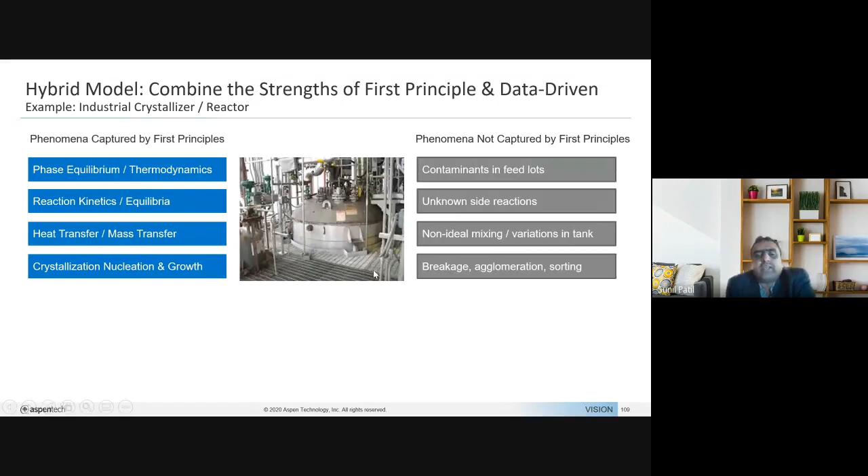So this is how the simulation can do it, but on the right hand side the simulation cannot do it. But I want to know what's happening inside my reactor. I can actually capture that by capturing data from the plant - I bring in data for every batch, every second the data has been captured. I bring that into my first principle model, and with this digital model I should be able to capture all the phenomena - not just first principle properties, but also phenomena like side reactions, non-ideal mixing, sorting, agglomeration.

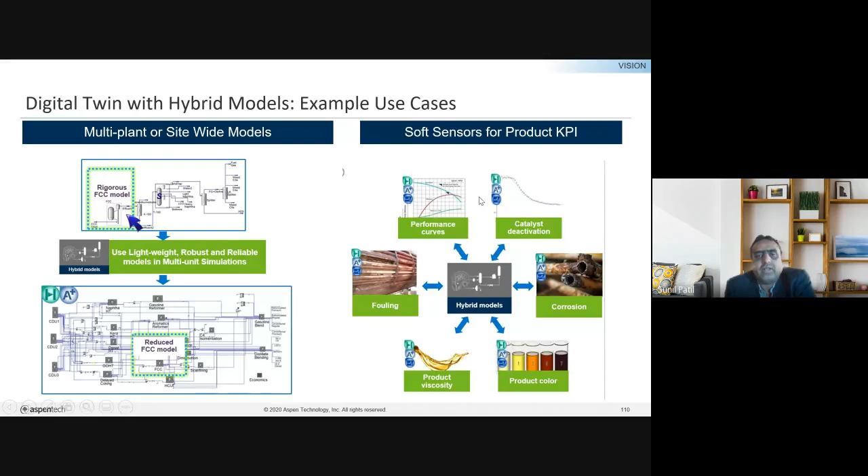And another example - there's something called soft sensors. For example, there was a question earlier on catalyst - this catalyst deactivation profile, or if there's an exchanger, whether it's fouling, or certain properties which we may not be able to calculate using equations, like color, morphology, corrosion, which is very difficult to calculate. One cannot really calculate these properties, but these are possible using these hybrid models. In other words, these are called soft sensors to calculate the properties. This is what we call hybrid modeling.

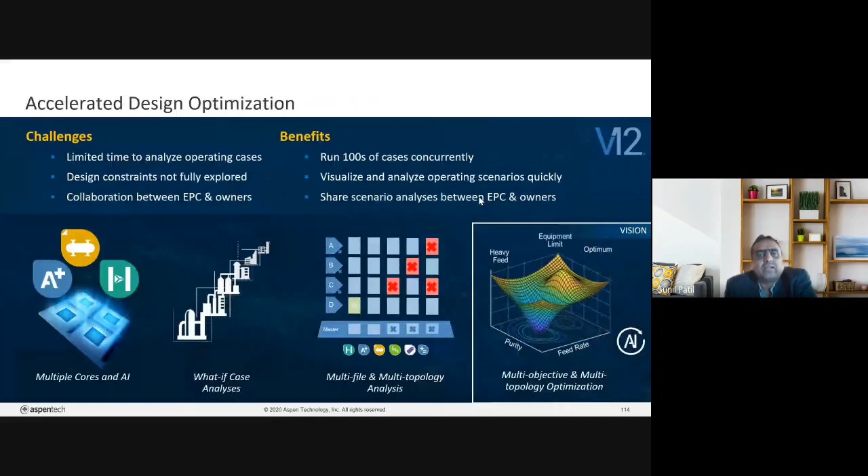Yeah, so these are detailed slides. I'll skip them in the interest of time, but I want to go to the next topic.

All right, so let me continue. What I talked about, hybrid modeling, is available today now. Let's talk about the future - what is the next generation coming now? What is the future of the process industry, or even for AspenTech? So delivering the future - let's look at what's happening with this technology in the industry.

People are looking at a few things. Compute power - how fast are your computers. We used to have mobile devices with 512 MB RAM and 1 GB RAM, now we have 16 GB, 32, 64, 128. Capacity is increasing even in mobile devices. Even for my PC which I'm running, you can see I already have 128 GB RAM - even a very small laptop. So computer power, the speed is going up, and people are looking to extrapolate by even 10 raised to 16 by 2025.

Edge devices, connected devices - the investment will go from 1.2 billion to almost 30 billion. And the artificial intelligence space - the investment in the year 2018 was just $600 million, now it will go almost to 40 billion.

And 85% of the top executives, CEOs of companies believe AI will be the future for their companies. AI will be the future. Like Mukesh Ambani says - oil is not the future, data is the future for Reliance. You've heard that sentence from him, right? He keeps telling that at his annual conferences. Similarly, top executives say AI is the future in the process industry.

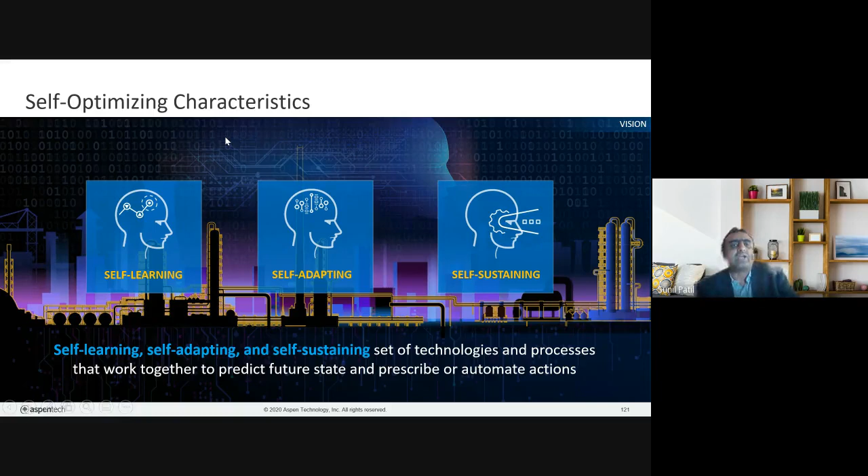Meaning, as a process engineer, I don't have to go to the plant and notice my distillation output isn't good or that it's taking too much energy. Before I even see it, the plant should automatically learn it, take corrective action, and run smoothly. That is what's called automating the actions - that is the vision, called self-optimizing characteristics. So there are three characteristics we are looking for: self-learning, self-adapting, and self-sustaining.

If I have data, if I know my buying pattern - in Diwali I buy clothes, in Christmas I buy this - this is my historical pattern of buying for the last 3 years. Automatically starting January 2021, my Amazon should be able to automatically prompt up with this information. This is January, last 2 years this guy has bought this one. Coming March, this is some other festival, buy this. So this is exactly what I'm talking about, self-learning.

Same like cars, I'm giving an example. Self-learning: if there's a traffic signal, the map will automatically navigate you, reduce the speed, increase the speed, change that lane - everything will happen automatically. That's about self-learning.

Then self-adapting: react, change the conditions. That is called self-adapting. If I know there is traffic and the car automatically changes my direction or lane or reduces the speed, exactly the same thing should happen in the plant. If I know that my plant is not performing as expected, if there is a drastic change, if the column is flooding, change the process condition, change my feed, change my steam flow rate - whatever is required to do that. That is called self-adapting.

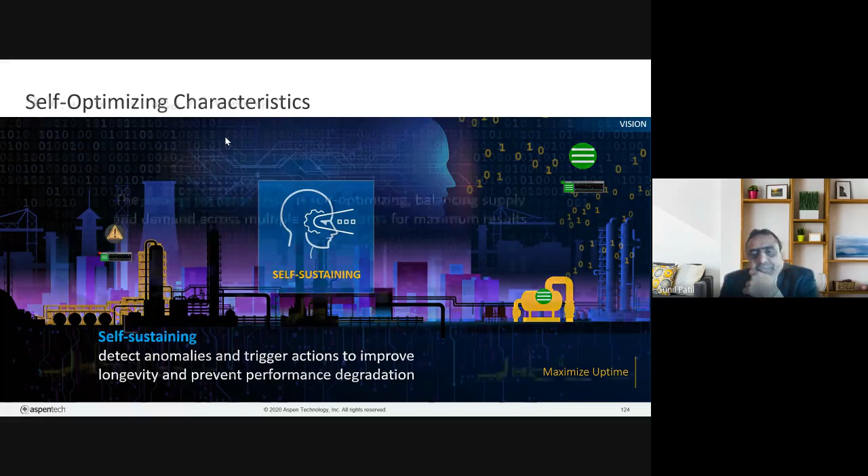So in summary, this enterprise value chain is self-optimizing, balancing supply and demand across multiple plants for maximizing the result. That is what we call smart enterprise, smart devices, smart mobiles. So we all are smart people these days, right?

Everything is smart. You don't see any mobiles with a keyboard these days. When we started using Nokia phones, those days are gone. Even it's hard to find a keyboard mobile. So it's smart things, smart devices. Same thing here - it's a smart plant.

So what's happening now? What I do next with this is continuously deliver insights to improve the operations by automatically reading this. I'll take a minute to read this - continuously deliver insights in the process operations to improve it, to automatically cut through the noise to provide transparency and guidance on what matters most.

Execute autonomously - this word autonomously is very important. Request human approval if required, and recommend human intervention if required. Meaning the plant should automatically run, but if it gets confused itself, it happens - in life, we ourselves get confused a lot of times, and we take advice, we ask others. Similarly, if at all it is required, ask for human approval or recommend human intervention based on the risk level.

If there is too much risk and the plant itself cannot take the decision, of course the process engineer has to step in and correct it. But if not, if it's a normal continuous process, it should run automatically. And that's what we call smart enterprise.

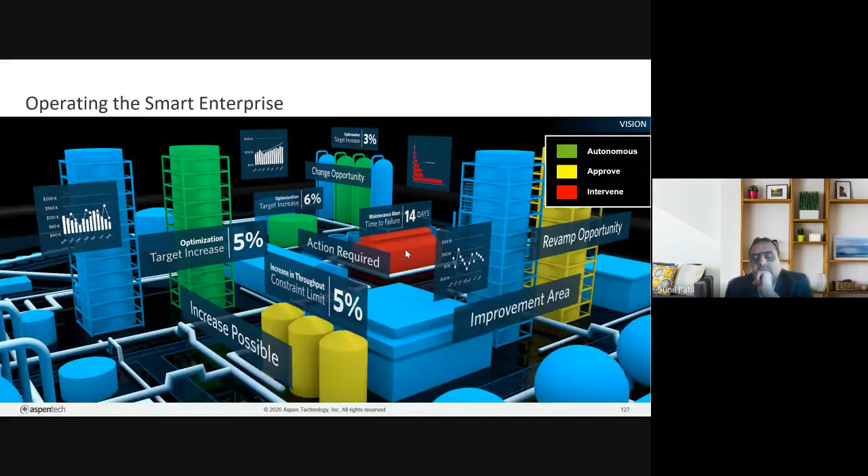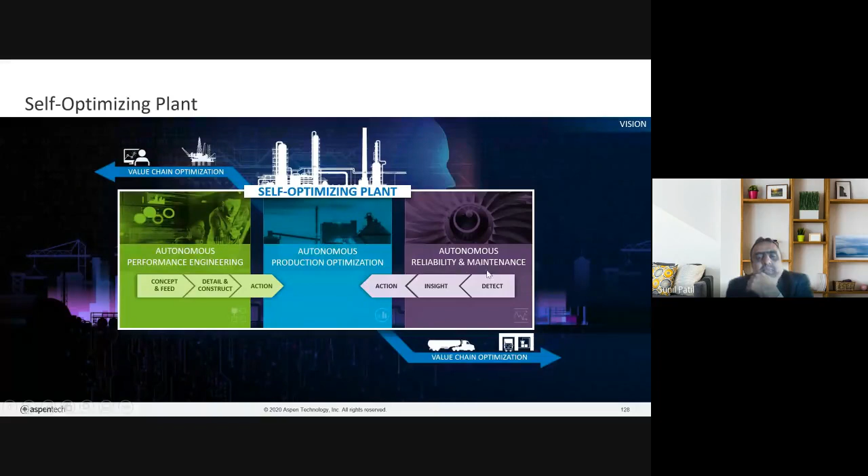So we call it the self-optimizing plant, to run the plant in an autonomous way, be it design, operations, production, reliability, maintenance - in everything actually. And this is the key step to the journey of smart enterprise.

I did not talk much, but needless to say, all the platforms are no more required to install in physical machines or any hardware. This is all about IIoT and cloud. Everything is managed by cloud.

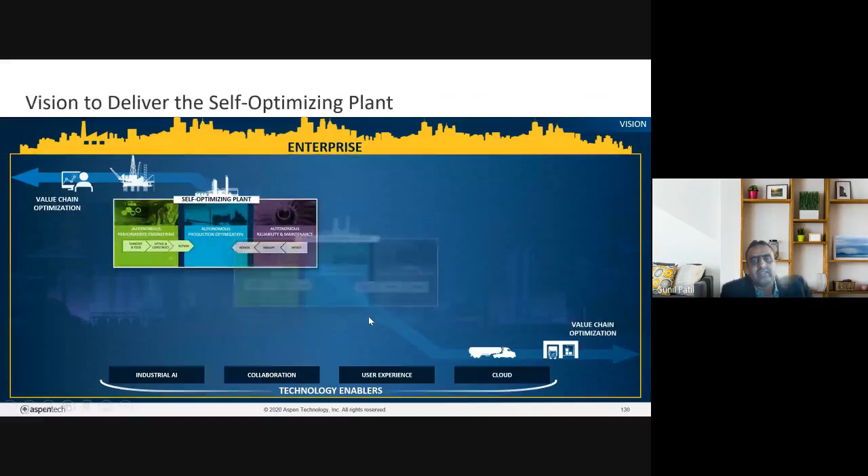So asset optimization powers the smart enterprise. We talked about asset optimization at the beginning, but in the end, what we are doing should power the smart enterprise, and that is the vision. That is the next generation. When I say next, we do not have to wait decades. At least I do not want to wait for my retirement. I want to see this happening in a couple of years.

What is final? I end with AspenTech's mission statement: accelerate the digital transformation in the process industry we serve, meaning any industry, whether upstream, midstream, chemical, pharma, metal, mining, power, whatever. We want to make sure the plant will be autonomous, but at the same time there is no compromise on safety, safer, greener, longer, and faster. Because time to market is very important, we want a quick return. Longer is important - life, greener, health and safety.

That's all, thank you everyone. I hope it was useful to give an overall perspective of what is happening today and what will come in future. With the right examples, I tried to share my best. I know we passed the hour, by about 20 minutes extra.